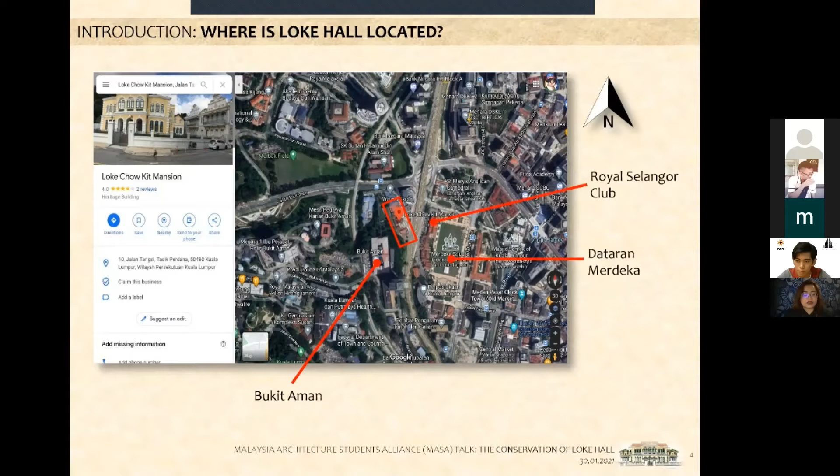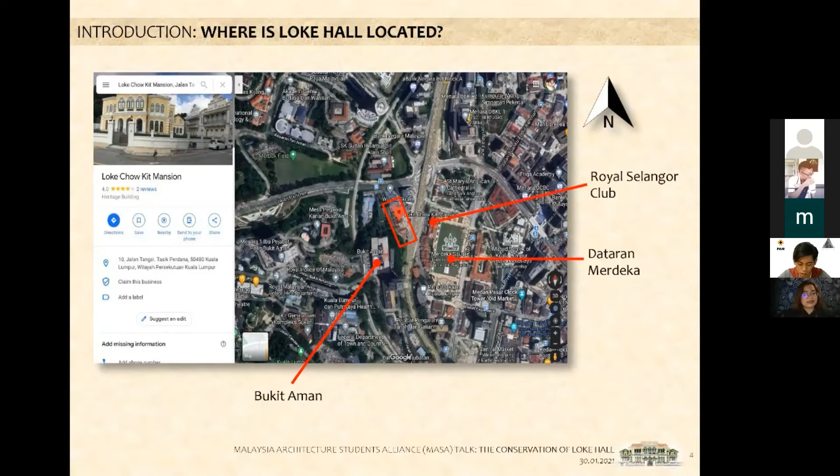So where is Loke Hall located? If you Google on Google Map, Chow Kit Mansion, you get the location straight away. In fact, there's a photo showing it - behind the building is Bukit Aman. Right across is the Royal Selangor Club, and also Dataran Merdeka, where visitors to Loke Chow Kit Mansion, if they don't have parking spaces, will park their cars under Dataran Merdeka and just walk across. If you turn the map clockwise 90 degrees, this is how it looks. You'll understand better with this orientation, because I'll keep using it in this slideshow.

He was born in Georgetown, Penang in 1860, the son of Loke Kum Chun, who was also born in Penang. So what does that mean? It means that the father and Mr. Loke Chow Kit himself are both Malaysian citizens, both local, like us. And then he went to Penang Free School.

Back then, Penang Free School was established as an English medium school. So what does that mean also? It means that he is an alumnus along with Tan Sri P. Ramlee, because Tan Sri P. Ramlee also went to Penang Free School.

And then he is a man of grace and style. You look at him, very eccentric yet astute and prudent. He is very visionary. He knows how to see things and grab opportunity for a better, calculative action in his businesses and future undertakings. He's very visionary like that.

And he traveled abroad extensively, both for business and leisure. There is a part in A.R. Datin Jun Ang's book that mentions he even drove for a tour around Scotland in a car. So he loved travel. And he started working with Katz Brothers Limited, a German firm based in Singapore, that just opened a branch in Penang.

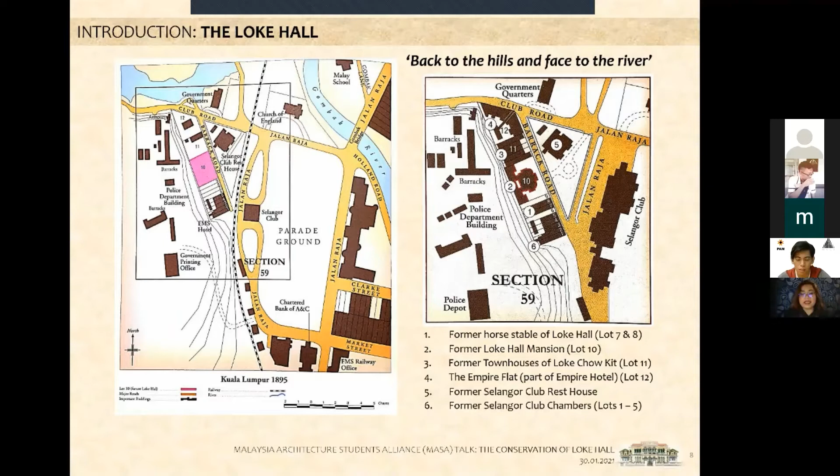So who designed Loke Hall? If you Google who designed Loke Hall, it would point back to A.K. Moosden, because A.K. Moosden drew Chowkit and Co. for Loke Yew. Loke Yew built Chowkit and Co. and leased it to Loke Chowkit for 30 years. So people keep thinking Loke Yew really liked A.K. Moosden, so definitely A.K. Moosden drew lot 10 Jalan Tangsi. But if you look at both characteristics, they're quite different, aren't they? So it's actually alleged but not proven.

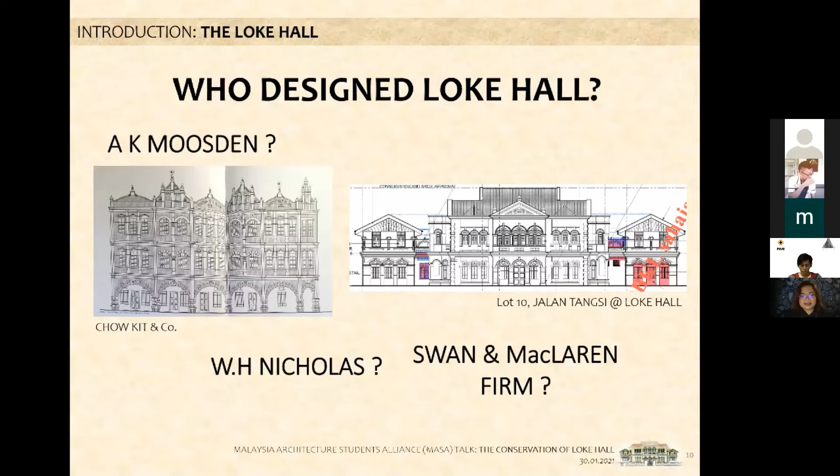Some say maybe W.H. Nicholas. W.H. Nicholas is a Straits architect, and Loke Yew was a loyalist to the Straits. So it might be him also, because he also built the Victoria Institution school, which was drawn by architect PWD back then. Or maybe he asked for help from friends - architect and engineer friends that he met at balls in the Swan and MacLaren firm, based in Singapore. So nobody actually knows, because it's not recorded anywhere who drew this or designed this Loke Hall. So the architect of Loke Hall remains a mystery.

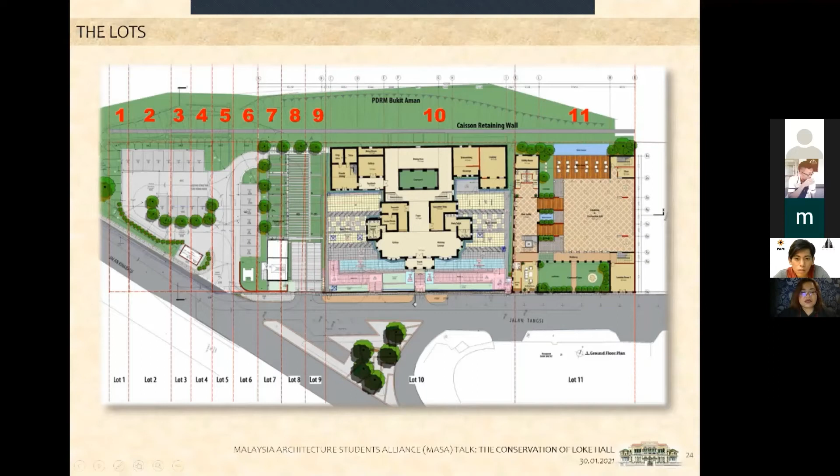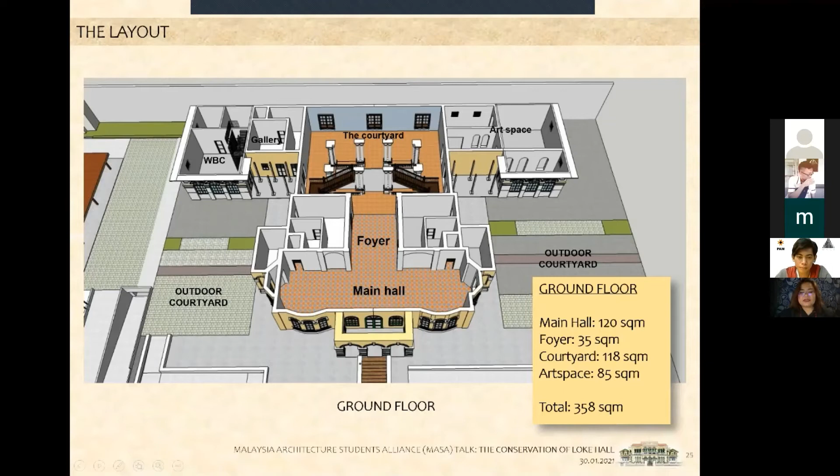And then we discovered from the old photos that these were actually supposed to be terraces with terracotta. So we opened it up and it became what it is now, okay?

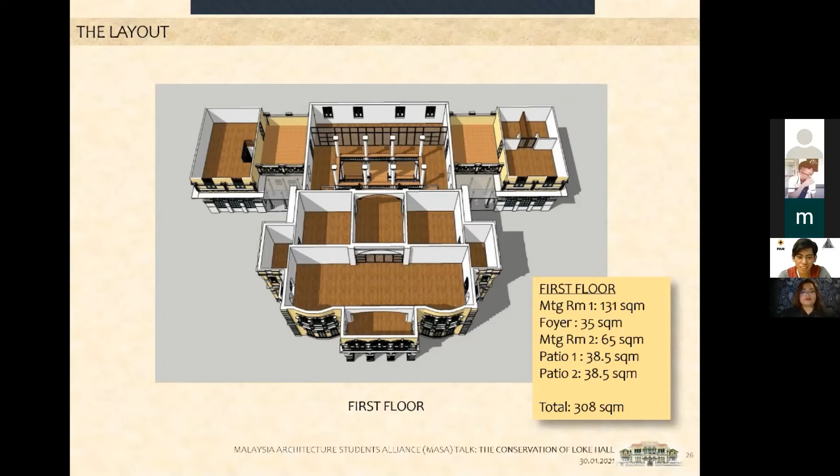So the potential and constraints. This study was done by the consultant architect, Azwan Architect. So this is lot 10. At site there, when they first went to visit, there were actually existing old tall trees behind a really precarious slope. Later on, I will show you.

And then there's some extension there, building over the boundary limit. So we were confused, how come this happened? Okay, and then there's all the split levels, and a courtyard.

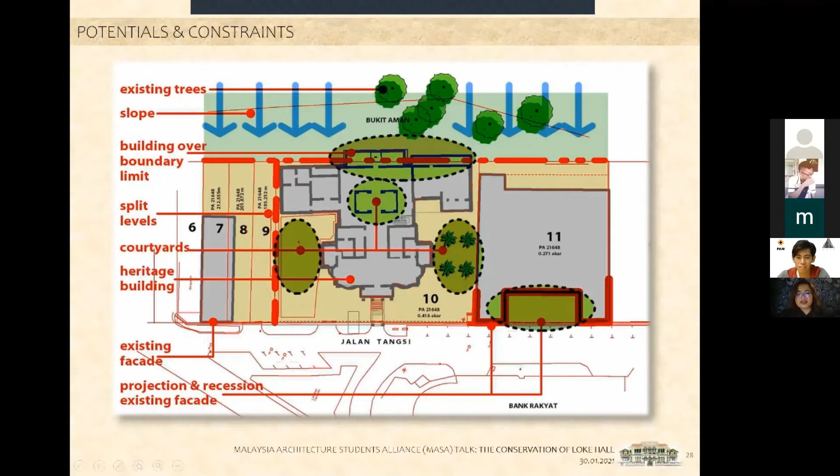This is the existing facade of the horse gable that belonged to Loke Chow Kit before, and then there's all this analysis of the facade to the road and whatnot.

Unfortunately with this gable, what happened was the first contractor, who we terminated, accidentally pulled this down. I think they were trying to demolish the building and the wall at the back, and not knowing about heritage buildings, they failed to first provide a support structure for this facade. So it just fell crumbling down, and we actually imposed a fine, a penalty for them, quite a lot. I think six figures for the penalty. So we terminated them.

So there's all these studies - there's a drainage problem, split levels and whatnot. This is the original building when PAM was still using it, so there's a sloped backyard. See these old trees, very tall trees, and the heritage building, and part of the fencing needed to be improved.

And then you see this very ugly feeder pillar here - how to Instagram like this, isn't it? So this is part of the study also. Some of the existing trees we thought should be maintained, but later we thought it's best to remove them. So finally, the conservation contractor started work on 4th February 2015.

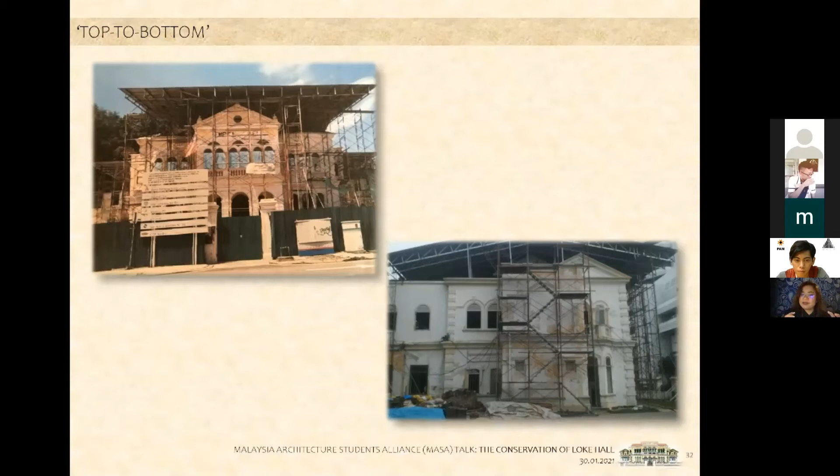A conventional project goes bottom to top, but a conservation project goes top to bottom. So this is one of the additional things - the second contractor's documentation, we thought it would be messy with a lot of variation orders and additional cost. So we thought it best to omit that from the contract, and retender it out to make sure the conservation documentation is in place, spelling out all these things.

Okay, so site issues. This is the behind-the-scenes stuff you guys must know, because you would not know these site issues unless someone who is in the project tells you.

This is what we call a hand-dug caisson wall. Why hand dug? Because it's dug by people - people go inside this hole. Someone waits on top, someone digs, puts the earth and stones in the pail, and the person on top pulls it up, puts it in a wheelbarrow and goes to dump it, continuing down until it hits a hard surface.

Some of it are 17 meters deep, and the width is only 3 feet. Can you imagine how claustrophobic it must be? So these people, I consider them our true heroes, because without them, who would do this hand-dug caisson wall?

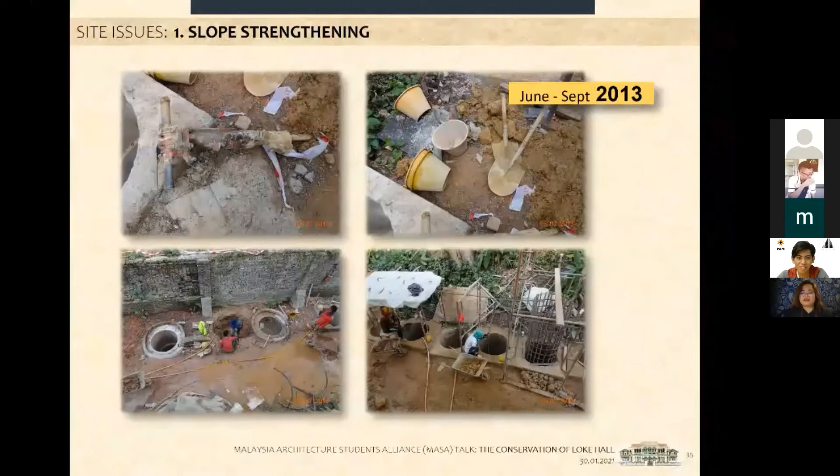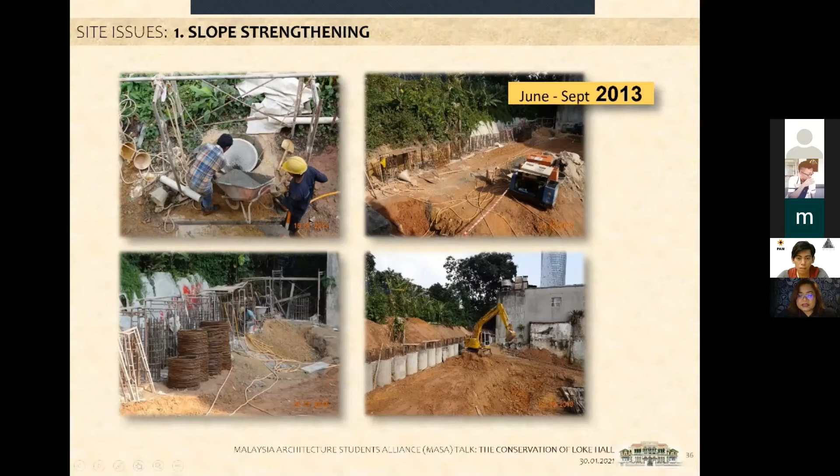So this is how it looks. They dig and dig, and then concrete is poured in. Now I will show you how it's done. So when you do this, you first dig the earth here, and then it becomes a wall.

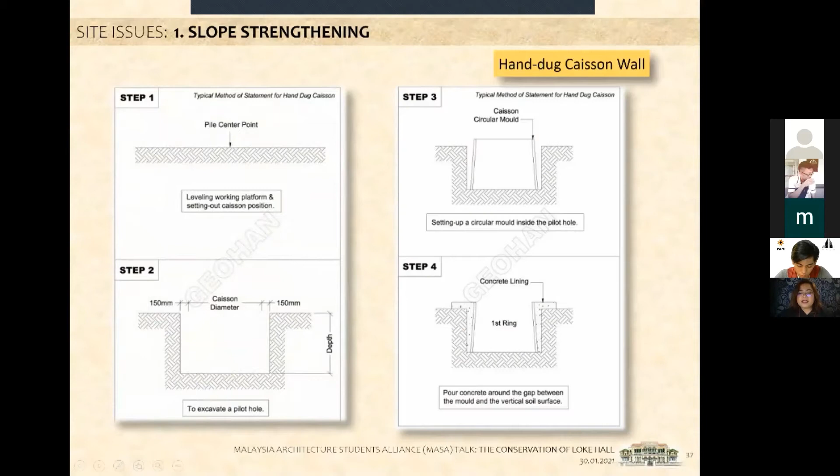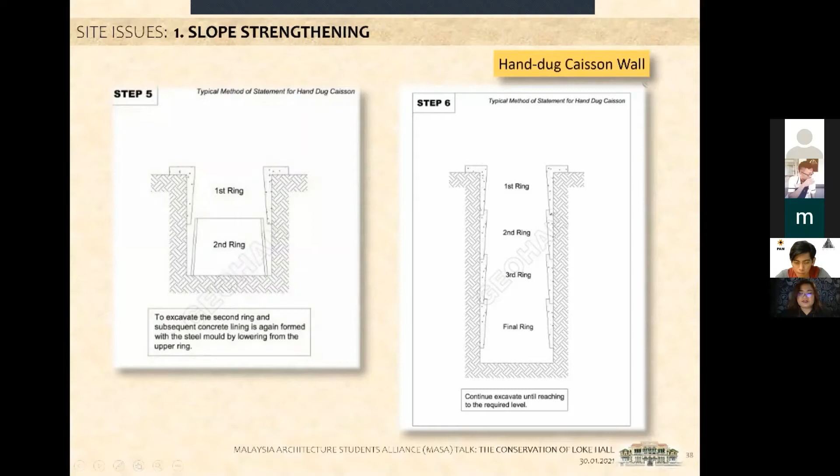So this is how it is done. Number 1, pile center point. Number 2, caisson diameter, you see? And then they will first put a mold on top, and then the first ring. And then you dig, and then put the second ring. And then like that, until you reach the hard surface, okay? And then last, you install all the cage and then pour the concrete. So that was very time consuming, and it was I think 70 meters long. So can you imagine how our heroes did this work?

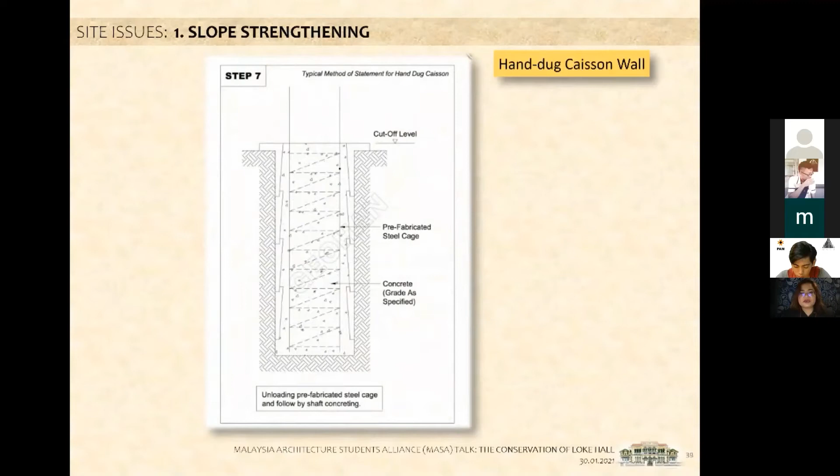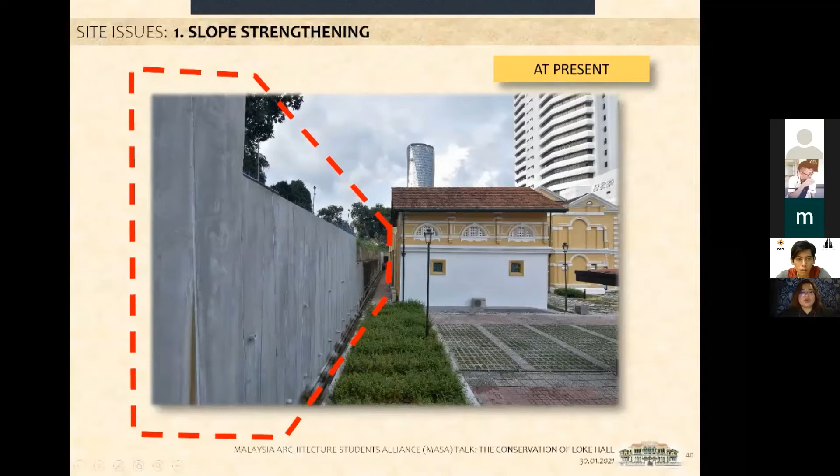And then we took time trying to find ways to cut the trees at the slope. So finally, in February 2015, I wrote for approval to have this cut by a specialist, and it cost a whopping 34,000 to cut 1 or 2 trees, whereas if the trees are just on flat ground, it's only like 15,000, 10,000 or 8,000.

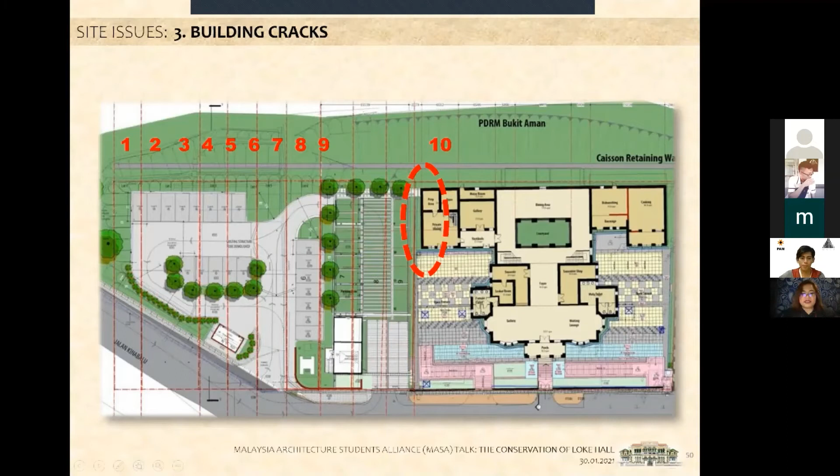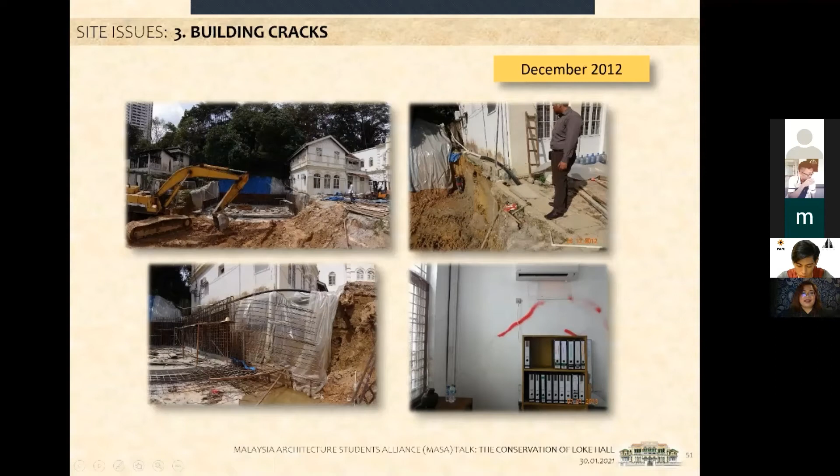Okay, can you see that? This actually, sometimes it became like a pool, all from the surface runoff water from the back of this building. Okay, so can you see the crack? Can you see the crack? But we addressed that crack, and now it became like this. Beautiful right? So Alhamdulillah, in the end, it became okay.

Okay, also site issues, building cracks at present came like this. So beautiful right? It was heartbreaking, very nerve-wracking, but at the end of the day, with all the consultants and specialists at hand, it became okay.

Okay, some conservation methods that I want to share with you. Some of you might have done all these conservation methods yourself, some are exposed to it, some of you listeners here are actually experts in conservation, but I'm sharing this for those who have never done it. So I'm sharing this just on a basic level, not too deep a method. Okay, so the first one was scrapings. This color scraping is part of the conservation method that needed to be included in the conservation documentation.

So you scrape pelan-pelan, slowly. You check the color first. Later on I'll show you the color checking. And then you scrape. This can take as long as 3 to 6 months just to scrape off the color, the old paint, to see what lies underneath and to document what you find out.

The scrapings need to be done because some of these old buildings use breathable walls. They are breathable walls, but people have been using acrylic paint on top of it over time, which is not breathable at all. So we need to buka, to buang, take off those old paint, and then we repair those walls with whatever conservation method, and then we apply water-based paint that is breathable, so that the batu-batu or the clay tiles or clay blocks that are usually used for heritage buildings can breathe through the paint.

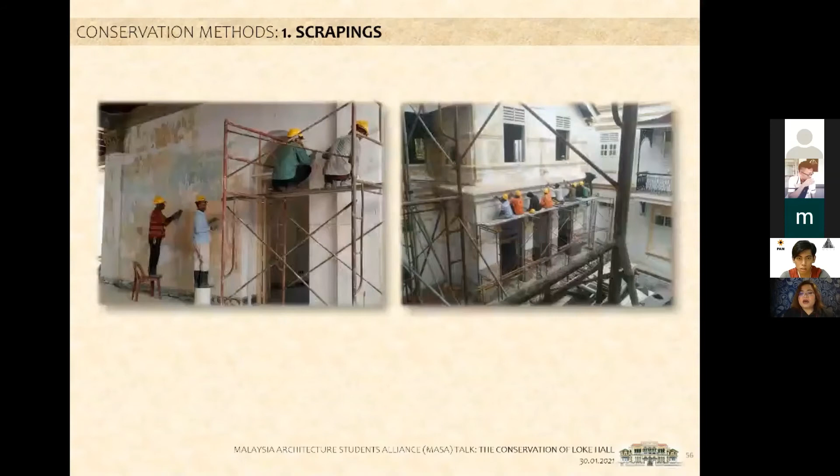But this was the reason, because we discovered that yellow ochre was the first layer when we did the scrapings. And then more scrapings. You see, diorang ni, can you imagine they membawang, working, talking about their families back at home? So while doing that, perlahan-perlahan, slowly they have to do this very carefully.

They were doorways, but these doorways, we think it was doorways to the ensuite bathrooms back then when they were hotels. So we didn't go into restoring the toilets again.

So we want to restore that place into a mansion. And then more scraping. So when you do scrapings, this is where you found out, oh, dulu sebenarnya, there's actually a storage area. We didn't manage to know or find out what the storage area is all about. What we just maintained it with masuk a niche like that.

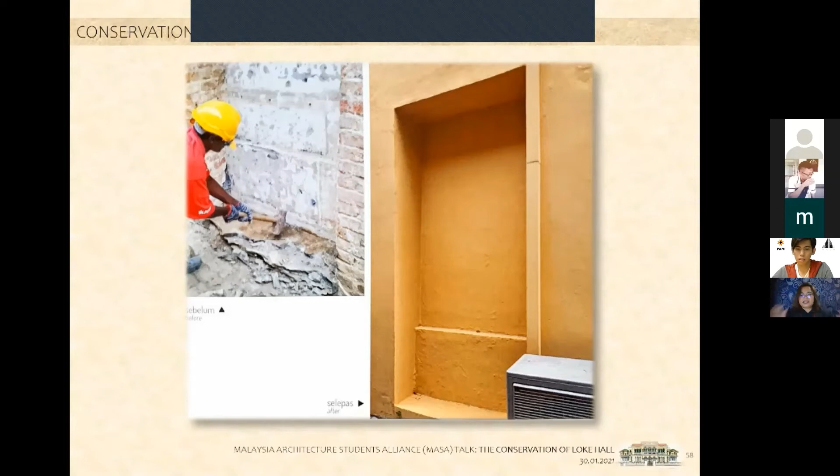So can you imagine how important this scraping should be in conservation works?

Okay, number 2 is color. How do I naikkan this? Sorry. Okay, this is checking colors. So can you imagine the tedious work that goes into conservation works, that you have to do color checking of the walls?

And then, okay, so this is roof tile sourcing. So this is the reason why we built this false roof or temporary roof, to protect the inside of the building while we go and check the roof tiles.

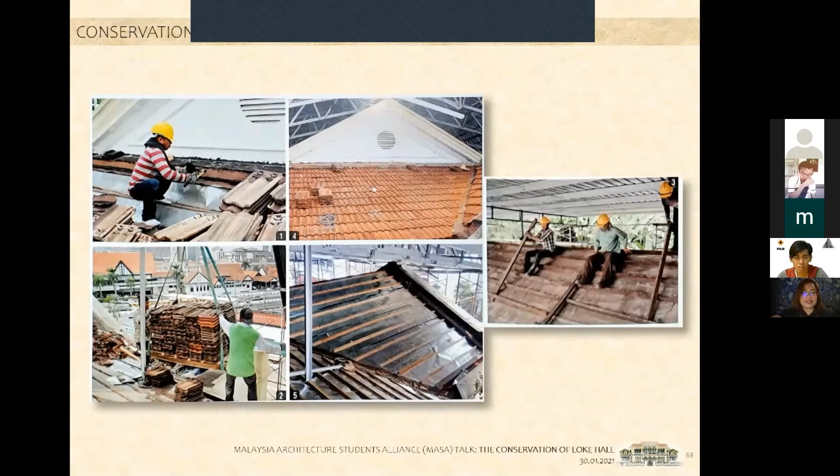So this is how they do under that temporary roofing. So they will take out all the roof tiles, they will check it, they will take it down, they will catalog it, they will clean it, and then they will check the structures underneath the roof tiles, and they document every single little thing that they check under this temporary roof.

Okay, while the temporary roof acts as a weather barrier, providing safety from the rain and too much sun, it's very heaty underneath. Can you imagine these people actually working up there right underneath the metal decking? I bet it's very hot.

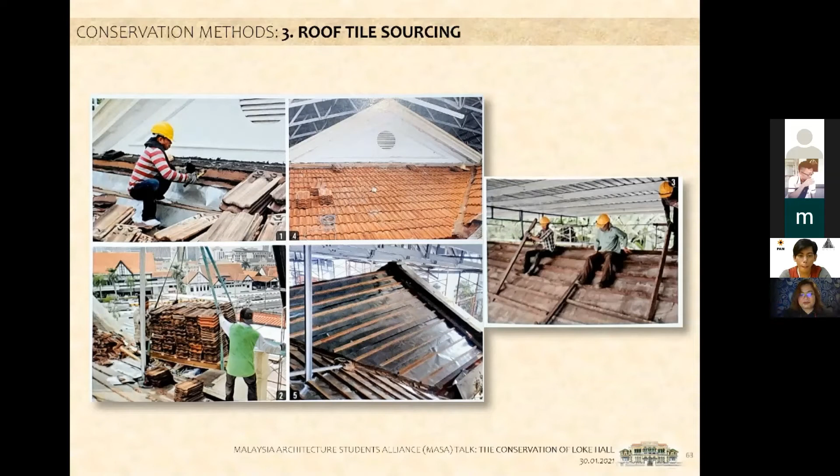Usually for a heritage building, the roof tile would be a V-shaped clay tile. But over a period of time, the V-shaped clay tile was replaced by Marseille tiles, so the roof batten section and pattern is different. So we continued sourcing from Arceta instead, to save cost, to replace all the steel battens, because it was replaced before. Originally it was timber, but I think over a period of time either the hotel or PAM replaced the timber with a metal structure.

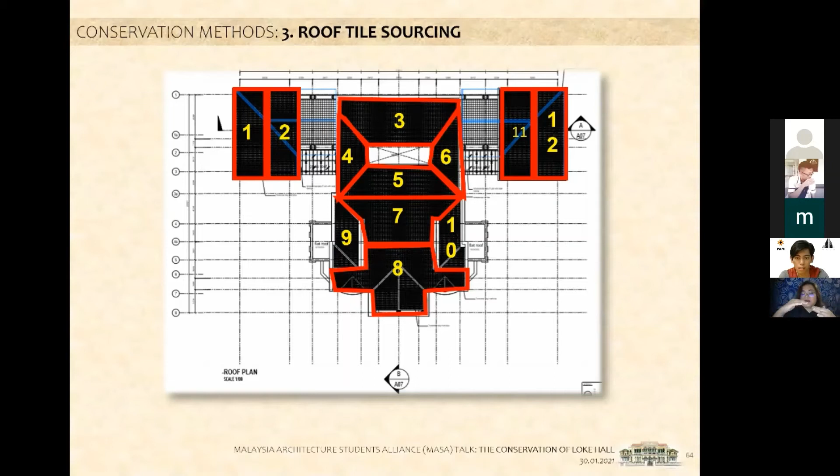Okay, paint research and mockups. We had some paint research and mockups, and one of those days we had a paint research demonstration by Dr. Donald Ellsmore, who taught us how to mix all the colors, how to compare them. It was very interesting, and Datin A. Arjun also was there to teach us based on her experience.

So even on the external wall, for a heritage building, we need to use water-based paint. For this building, we're not trying to advertise Nippon or whatever, but we found that the water-based Nippon Easy Wash lasts long with the weather. Even now, we haven't repainted the building since 2017, but it still looks nice. The color doesn't trap dirt from the rain or the air outside.

Okay, reconstructing abacus and necks. So there were colors, you see, they were painted over. So we cleaned the abacus up, and then reconstructed it so it would look right. They had specialists to build the mold slowly with plasters, very carefully. Later on I'll show you the after photos, where it looked like the original version.

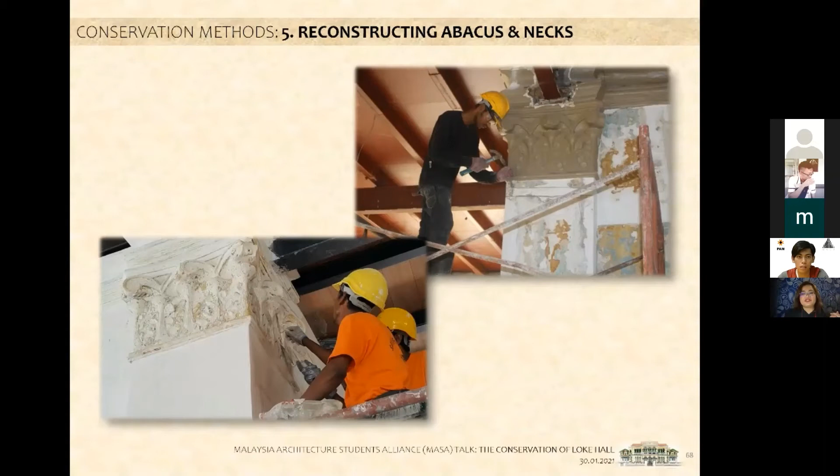And we also reconstructed the baluster, the balustrades. These are all ceramic handmade, so we had to reconstruct them also, and we put tagging there to show that those with tags are the new balusters.

Okay, other processes. There's also material testing - timber, tile, plaster and so on - you have to send these to laboratories. This kind of specification or scope is not listed in the conventional construction documentation, it's specifically mentioned in the conservation documentation.

Okay, salt damage and rising damp treatment is also a different method from the conventional ways. There's desalination using poultice and sacrificial plaster. This one is very interesting - all you need to do is Google it on YouTube, and you can find how they do the sacrificial plaster to draw out the salts from the wall.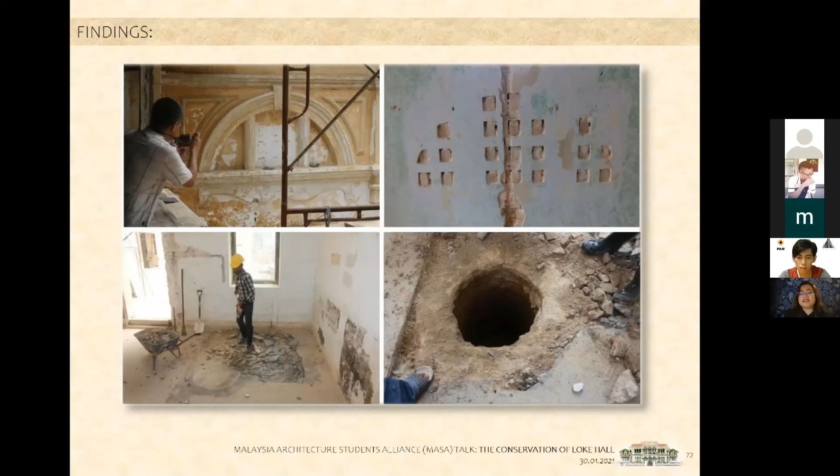When we scraped, we found the writing 'Empire Hotel'. We documented that, but we had to paint over it. Most importantly, we documented it first.

Then we saw the ladies' lavatory and the gents' lavatory, on the left annex behind, underneath the left terrace. We documented that also. On the right side, there was the Marseille tile that we had to throw away because of the bitumen painted on it, which we couldn't remove.

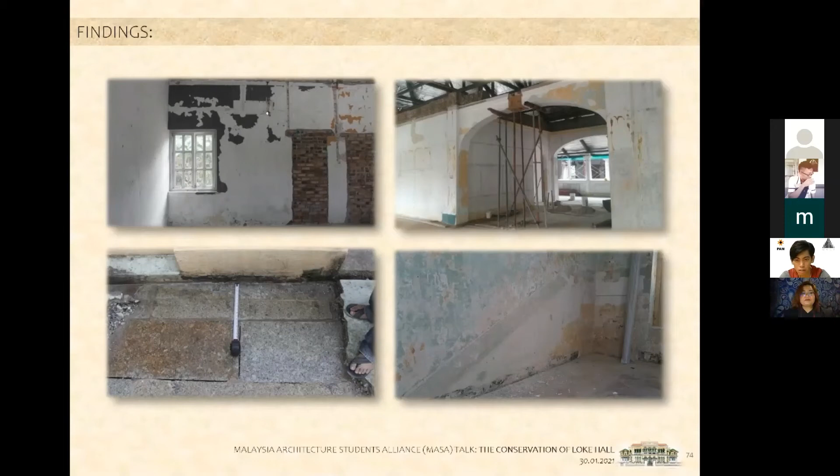We also found sisik angin, which is a kind of ventilation louver.

So after the photos, we're almost at the end of the slideshow. The ground floor - can you see how lovely that is? Can you see the ceiling there? Before this, it was covered by a plaster ceiling, and then we discovered the steel beams. It turns out the steel beams are original steel beams from Lanarkshire. We found the name there, documented it, and just painted over.

And the floor tiles are actually original floor tiles. Having said that, we still documented all the exact measurements and put it in the tender document just in case we needed to replace it. The contractor would have needed to source this from Vietnam. But we decided that even if the floor tiles are broken, we let them be, because it brings characteristics to the space. So eventually the provision for these tiles was not used at all in the tender.

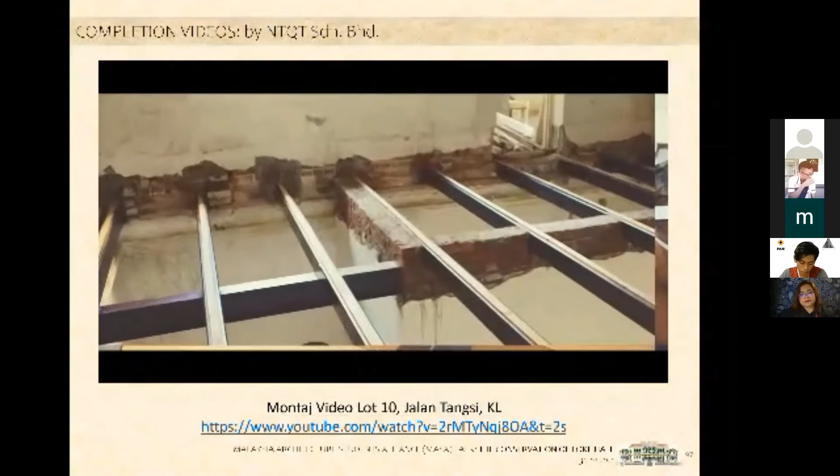Actually, there is a part in the video that showed metal beams, steel beams. I didn't mention the findings there because what we found is that not only was metal decking or metal plate used as flooring before, the steel beams were also raised, so the first floor level was on a different level. So when we decided to use timber flooring instead, we had to lower the metal beams, and finally we managed to get the flooring to be at the same level as the existing staircase. I didn't put that in because I missed it, but later on, maybe in future lectures, I would put them in. So with that, thank you.

And the owner is Dewan Bandaraya Kuala Lumpur, and I have to thank all the mayors and bosses for supporting this project. The lead consultant is Azwan Architect, the consultant conservator Datin A. Arjun of CGBC Consultants Sendirian Berhad, the conservation contractor NTQT Sendirian Berhad, and the program manager or caretaker of the building now, Citizens.